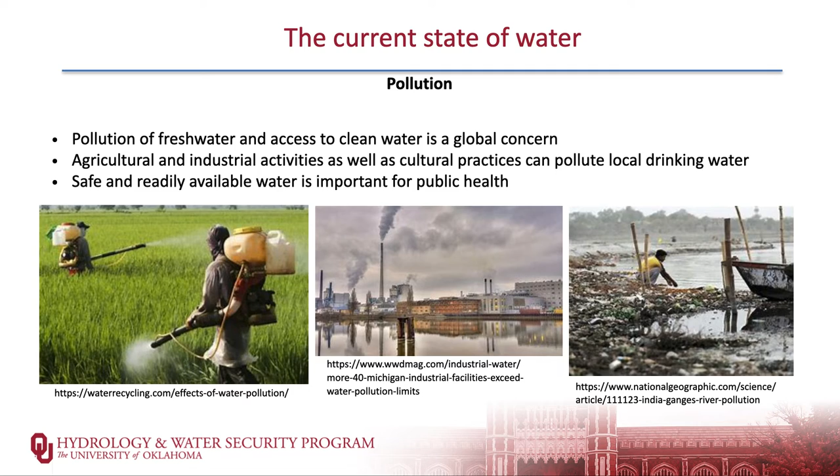We also talk about conflict zones with water, and we know that's the case throughout Africa, some parts of Asia, and South America. We need to understand that limited access to fresh water is creating some of these conflict zones.

Women and children are a big proponent of water access and sourcing in Africa, and the burden is on them to do so, making them unable to perform many of their other duties. We know that social structures and social dynamics are different in Africa, and that's a great cause for strain within those social nets.

Desalination is the process of removing salt and minerals, but it also needs to be noted that there are sources of that water, generally seawater, brackish, or wastewater. With thermal desal, one of the oldest known desal technologies, it relies on alternating evaporation and condensation of water. After the water is distilled, the impurities are separated.

The distillation doesn't remove all the volatile chemicals like chloramines with the same effectiveness that reverse osmosis does. The techniques are robust and reliable, but they have little potential for further improvement. They're energy intensive, and they typically produce quantities of water far less than what's needed. So that's the thermal side.

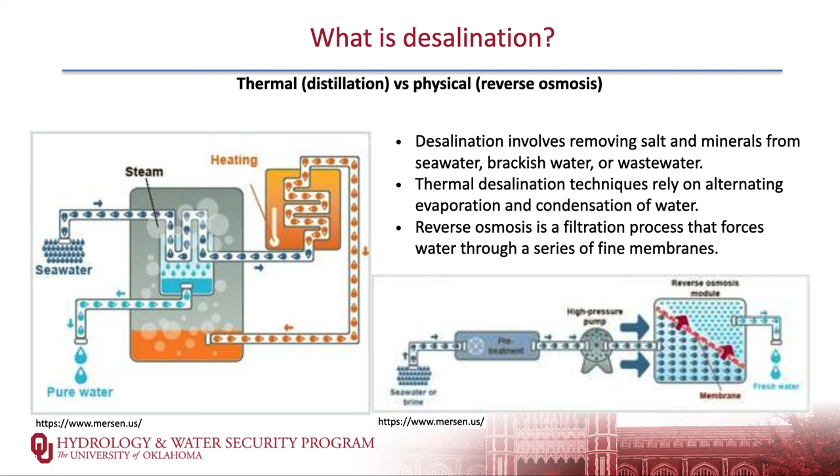What's left is called the reject stream, which is that hypersaline water, and what's fed through is the permeate. The choice of process depends on a lot of parameters, but first and foremost on the nature of the water to be treated, seawater or brackish.

We talk about seawater desal, and it must be adjacent to the ocean, so location is a big deal. Seawater reverse osmosis is typically more energy intensive than brackish, about 10 to 14 kilowatt hours per 1,000 gallons versus brackish, which is about 3 to 5. So it's a little more than double.

The plants have the advantage of returning the brine to the sea if done in a diffused way. It's a little safer, and it's plentiful—the source is plentiful, it's the ocean.

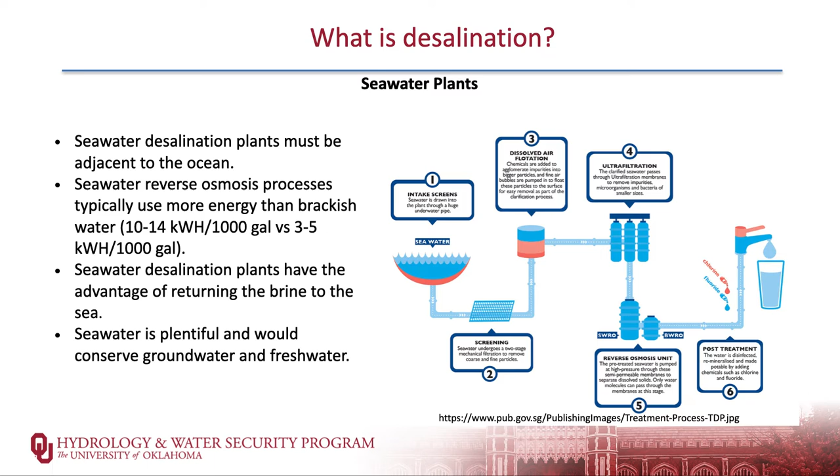Brackish locations are a little more flexible. The farther the source water is located from the ocean, the lower the salinity, with those total dissolved solids, and the lower the osmotic pressure required, so the lower the energy expenditure. While brackish has a lower proportion of total dissolved solids in the feed water, it's a little more challenging to dispose of the produced concentrate, but it requires less energy to overcome that process.

When we compare the cost between brackish and seawater desal, the major aspects to evaluate are location, transportation, potential co-location of seawater with a power plant, sustainability, technical and economic factors. So there's quite a few factors to consider.

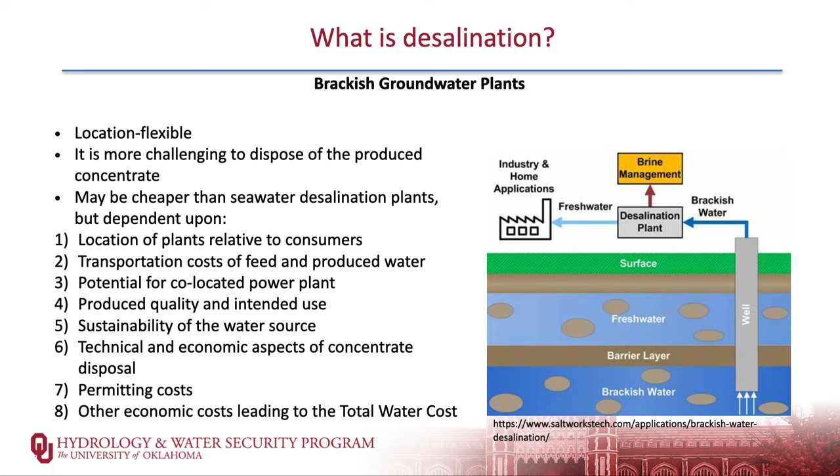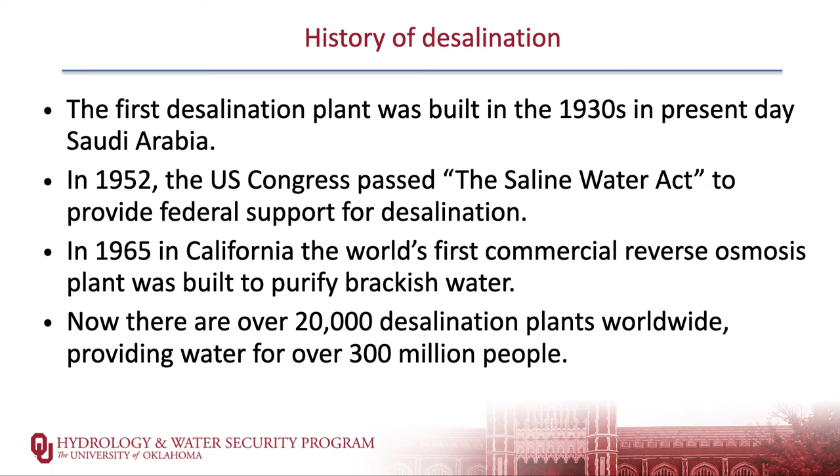The first desal plant, we talked about the history, was built in the 1930s in present-day Saudi Arabia—they're kind of the progenitors. In the United States, Congress passed the Saline Water Act in '52 and '65. California built the first commercial reverse osmosis plant. And now, where we are today, there are over 20,000 plants worldwide providing water for over 300 million people.

The use of groundwater to irrigate crops beginning in the 70s almost depleted Saudi Arabia's aquifers completely and set the country on a completely unsustainable path. We talked a little bit about this in class. The government had to end subsidies for water-intensive crops. It's essentially the largest country in the world without running surface water and has one of the highest rates of water consumption in the world. So providing new sources of potable water for the Saudi kingdom, their growing population and expanding industry, is going to be a real strain and has been.

As of October 2020, they had a total of 33 desal plants in 17 locations run by the Saline Water Conversion Corporation.

Ultimately, the United States is on a different track, and they began their desal in the 1960s after John F. Kennedy spoke of the need for desalination. San Diego recently went online, and they've had a bit of controversy, but their plant is massive, costs roughly $1 billion for that plant. Historically, San Diego kind of relies on the Colorado River for their water. However, with a permanent aridification of the West, the source was drying up, and so they expanded to desal.

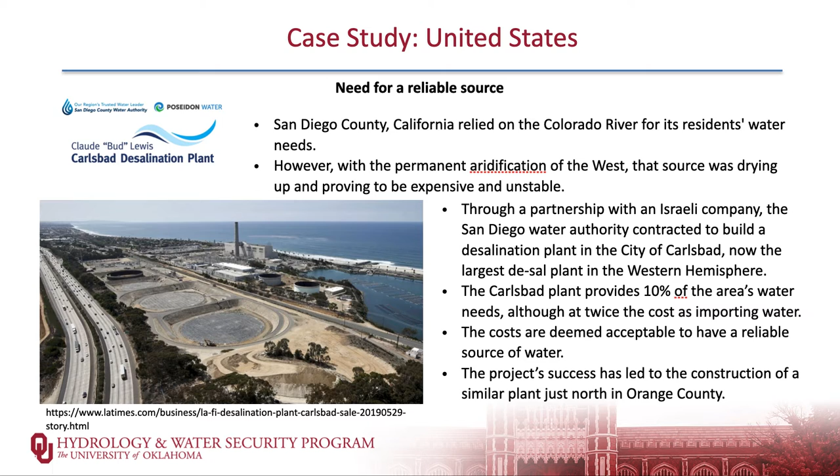The project's success led to the construction of a similar plant in Orange County, in Huntington Beach, and that's also a contentious issue. So the California Coastal Commission scheduled a vote to end it actually this month here in May of 2022, and we'll see how that plays out. But it goes back to the fundamental question: is it worth the energy cost? There's 17 of these plants in California currently, but we're in the driest period in California in 1,200 years. So this is going to have to be part of the solution.

Then we get to Israel, one of the driest regions on Earth. The surface water coming from the Jordan is disputed among 3-4 countries, and the groundwater's become undrinkable due to encroaching seawater and sewage. So this is a great success story.

The government approved the construction of new reverse osmosis plants along the Mediterranean, and they've embraced the ethic of efficiency, low-flow toilets, shower heads, nationwide National Water Authority building innovative treatment systems. We talked about it extensively in class, and they recapture 86% of the water that goes down the drain and use it for irrigation.

Just amazing. So today they get 55% of their domestic supply from desal and brackish groundwater, seawater and brackish groundwater, and they produce 150 million cubic meters. Their national system uses a pipeline to connect desal plants with consumers, making it possible for such an incredibly significant portion of the population to get its water supply from desal. So that's sort of an amazing process. Their approach has been successful.

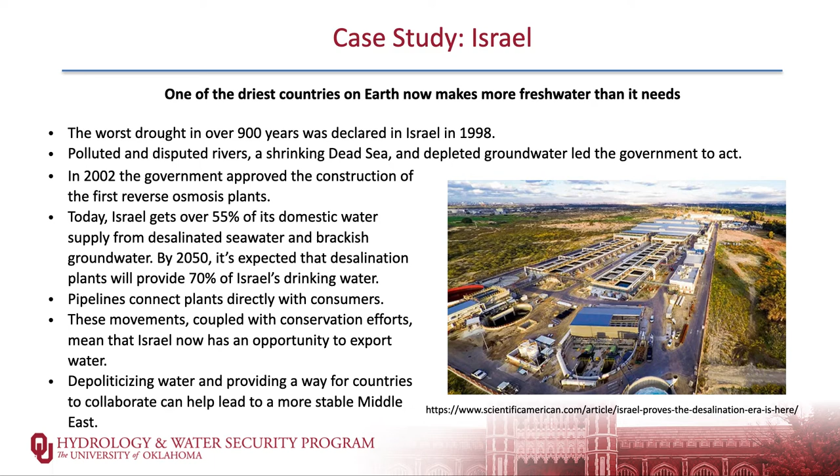When we look at Singapore, also a bit of a success story. They lack natural water bodies. Population is over 5 million. They need to creatively manage their water. The extreme challenge that they had endured was 430 million gallons a day, and they had to figure out a way to supply that, so they created the 4 national taps.

Water from local catchments was one piece of that. Imported water, high-grade reclaimed water, known as new water, and then desal. So the 3 main stages in purifying their water was, first, microfiltration. The second stage was reverse osmosis with a semi-permeable membrane. The third was ultraviolet disinfection, which kills the bacteria and the viruses.

The process they're using, reverse osmosis, takes 3.5 kilowatt hours per meter cubed of energy. It's quite energy intensive, and they're hoping to reduce that through electrodeionization, incorporating more green energy supplies. Their electric field pulls the dissolved salts from water and only uses 1.65 kilowatt hours per meter cubed. So there are some areas for efficiency.

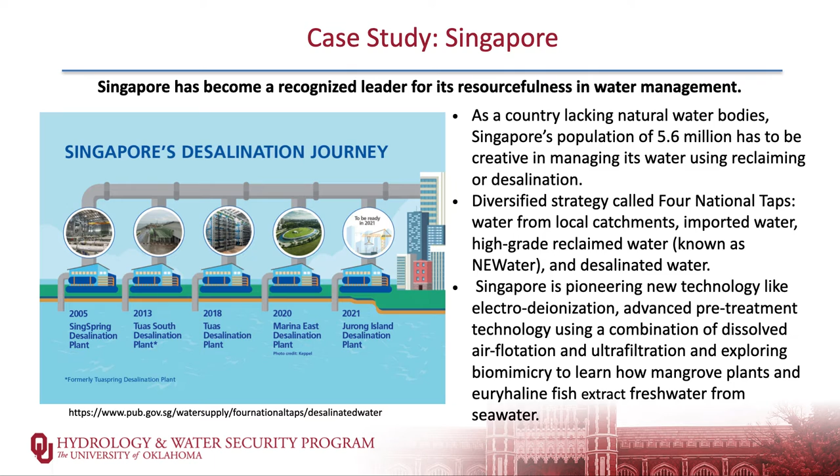So desalination, what are the limitations? We talked about the cases, but not as much about limitations. Location is a huge limitation. You can only access seawater if you're on the coast, and brackish water is only in those back inland waters. You have to be near the source to produce that product. Brackish has the lower energy expenditure, while seawater plants are intensely energy intense. So when building a plant, the type, the cost to the consumer, who's going to pay for it, how they're going to pay for it, that can be burdensome.

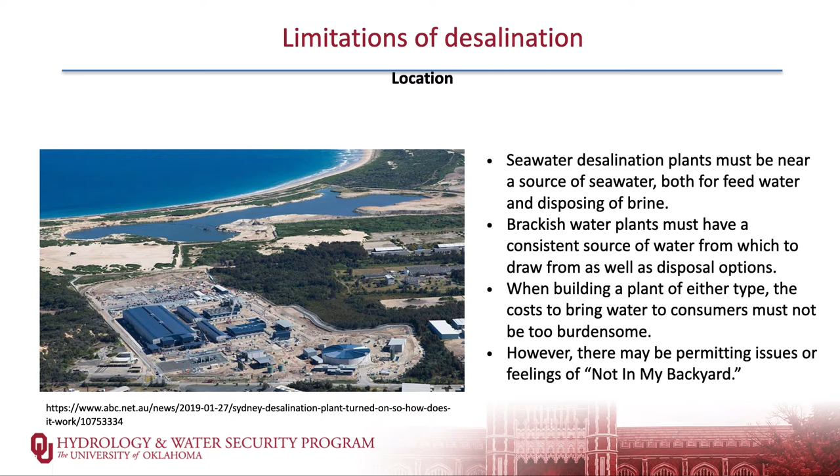However, there are permitting issues as well, so a lot of people with a not-in-my-backyard situation that we see throughout America.

Desal is not without its environmental critics. Using fossil fuels to power plants can produce a ton of greenhouse gas emissions. Creating fresh water out of seawater, we need to do something with that brine, that salt that remains, and it can be so rich in contaminants that it damages the environment. It can steal the oxygen if it's not diffused properly. On the coast, it's very strong, can kill wildlife and vegetation. We need to take into account that there are anti-scaling agents and chlorine-removing chemicals in the brines.

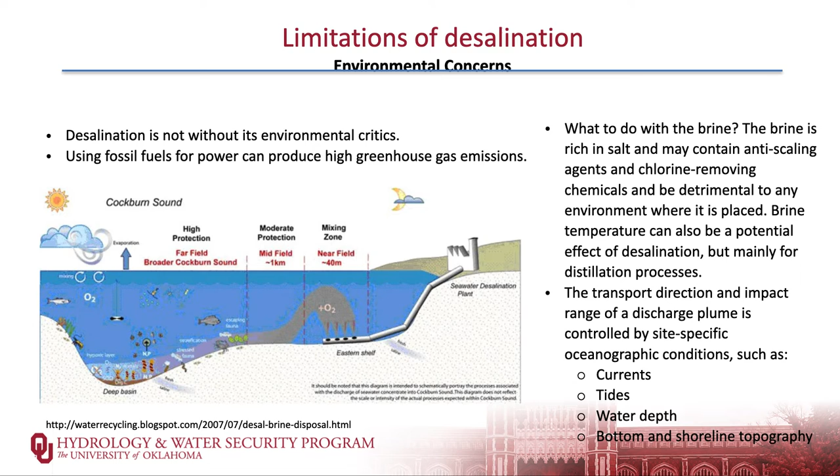There are ways to mitigate it, and the discharge system is an important piece there. In Perth, Australia, they manage the direction and impact range of the discharge plume in a controlled way so it doesn't impact fisheries, taking into consideration tides, currents, and water depth. It's a thoughtful process that needs to accompany that discharge.

There's also a limitation of process. Are we going to do distillation or reverse osmosis, seawater or brackish, as I said? They all use a lot of energy. Currently, desal around the world consumes 200 million kilowatt hours a day, with the average energy cost between 40 and 50% of operating costs.

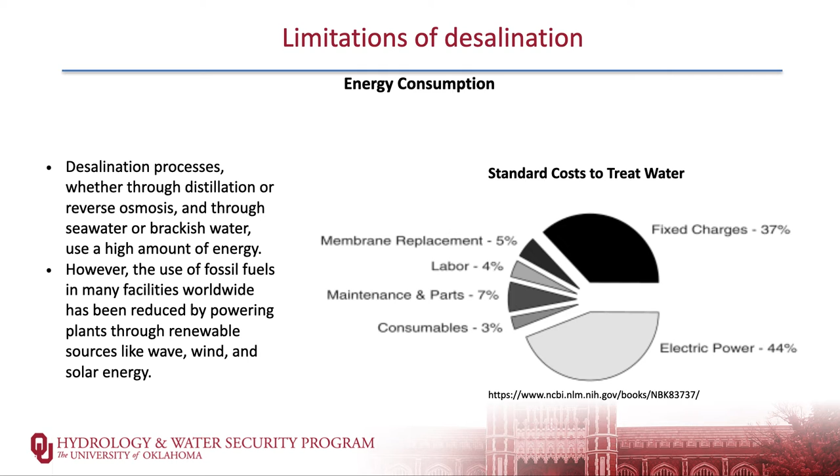It has to be noted that we've reduced using fossil fuels in many facilities, so we're getting better, but this was largely dependent on fossil fuels when energy was cheap in the 60s, 70s, and 80s, and so we're trying to make that switch and change our energy portfolio. Desal can be expensive for both distillation and reverse osmosis, but over the last three decades that cost has dropped by more than half, so that's good to see.

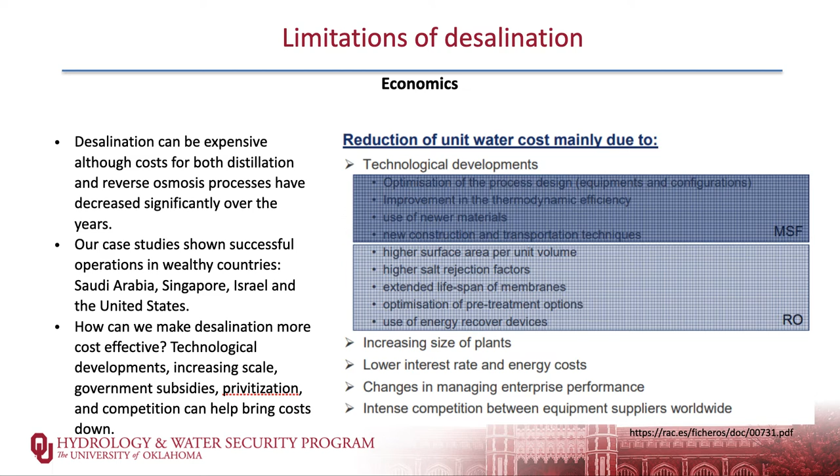The case studies show operations in wealthier countries, 75% or more of these desal operations are in places like Saudi Arabia, Singapore, Israel, United States. How do we make it more cost effective? Well, technological developments, things being done at MIT with nanotechnologies, making more efficient membranes, incorporating renewable sources of energy, increasing scale, government subsidies, privatization, and competition are going to help bring some of these costs down.

Advances in technology, using chemical-free processes like porous lava stone, concentrate management—we talked about that before. Electrodeionization in Singapore is also an emerging technology that is leading the field, and we're hoping to see that coupled with their biomimicry.

More desal plants are built coupled with solar, like in Australia, the Sydney water desal plant. They use solar and wind, actually coupled with a 67-turbine wind farm. New renewables to work with these plants are huge, but currently only 1% of desal plants use those renewables.

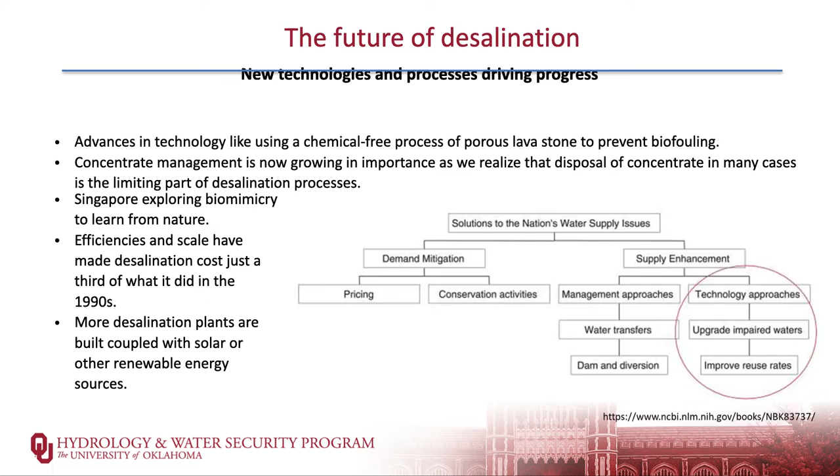So it's an important tool in fighting water scarcity. It's not a panacea, but it can be a reliable source of water when the world's aquifers are getting depleted. There are diverse options. We can build conservation into the model like Israel does. Saudi Arabia does something a little different in terms of their operations, working with the private sector, which can be a piece of the success moving forward.

But ultimately, it's about energy and cost and impact. These are the things that motivate humans to make decisions. So having a reliable water source to drink, and considering the world's scarcity and potentially facing some of these changes in climate change, we need this opportunity, and we need it at a better cost with less environmental impact, and we need to share our technologies.